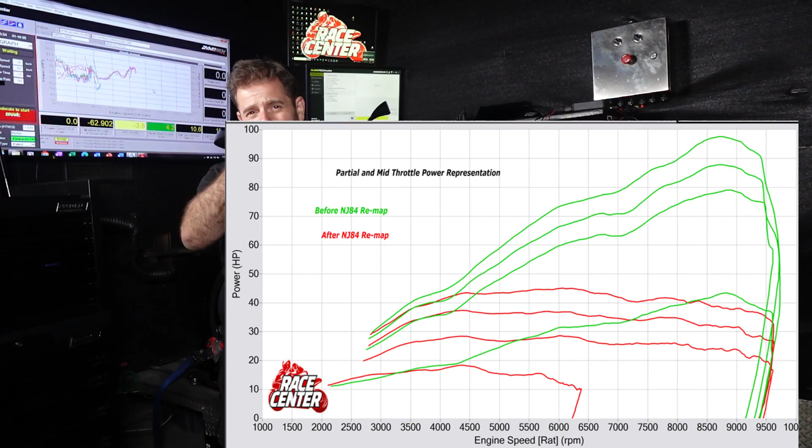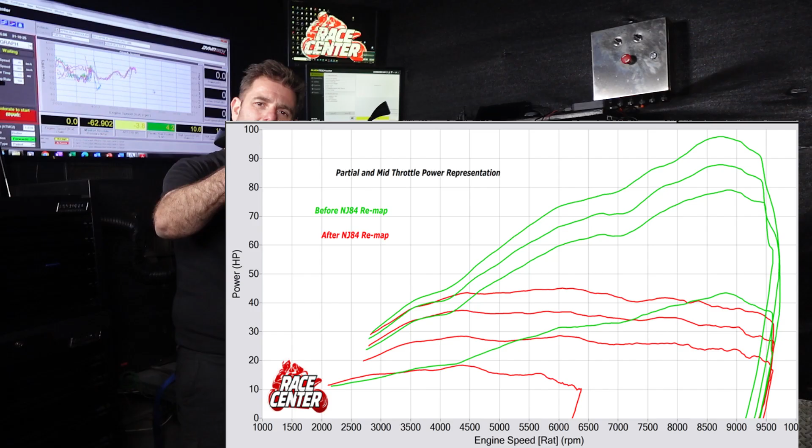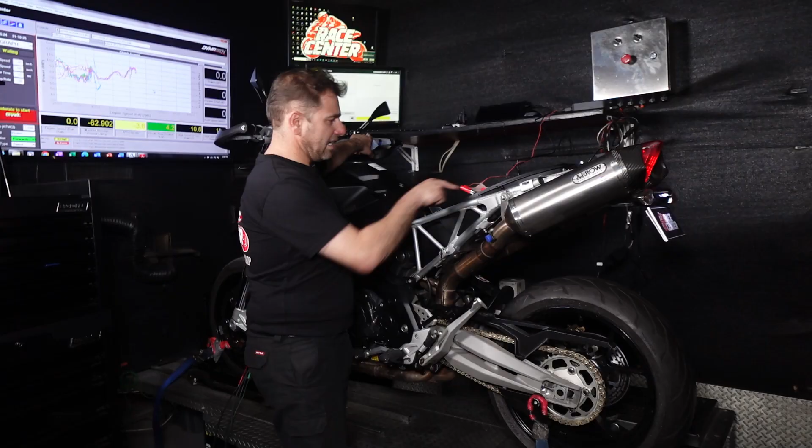You simply can't, because the way it's mapped, even if you're just going say 30% throttle at 7,000 RPM, it's going to give you like 60% throttle, even though you don't want that, because that's not what you've requested. You've opened the throttle a certain amount, and because the revs are high, it's going to give you a burst of power. So all that nice, lovely partial throttle, a little bit of power if you're going through corners or you just want a little bit depending on the RPM, you can't get it standard. They've taken it away from you because the ECU will open the throttles more than you want, because that's how it's been programmed.

So you need to understand this with these Dorsoduros, and I highly recommend getting rid of that, because when you turn them into a proper linear throttle, it's so much more enjoyable to ride. You still have all the peak power and all the mid-range and all that burst of power that is standard, but you also have all the small stuff and all the power delivery that leads up to that.

When we look at a dyno graph, it's important to understand that we're only seeing one run. If you imagine all the different throttle applications you do with your hand, you'd see all sorts of different power runs, and that's what we feel in the real world. That's what power delivery is, we're actually modulating that with our hands, and that makes it so much more fun to ride. Same with the brake, you can modulate the brake pressure you want. That's part of riding, that's the enjoyment of what we do.

When the ECU is not respecting what your hand's doing and it's doing other things like opening the throttles more than you want, you miss out on a lot of the power delivery and a lot of the power range that the engine can produce.

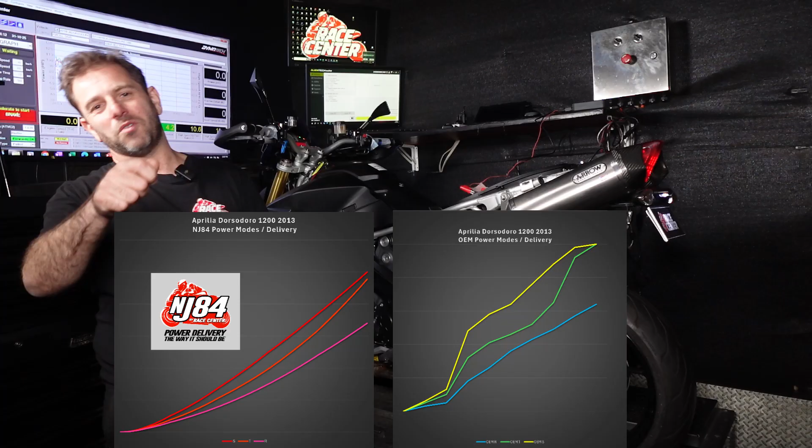Once that's all corrected, the difference is night and day. Completely different motorbike to ride. You have complete control over the power, so it's much smoother to ride. Still exhilarating, if you want all that power, all you have to do is punch it and it will deliver. But if you only want a bit, it just gives you a bit. So much more control.

So on that, the NJ84 power and torque remap in these bikes is an absolute must. It transforms the bike. On top of that, we've also done a beautiful fuel tune on this one.

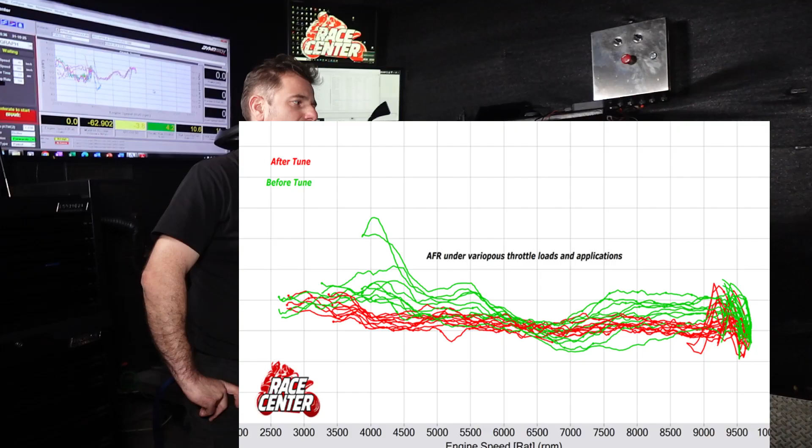This one's got a 3/4 system. It's got standard headers, but an Arrow collector and slip-ons, and it's come up beautifully.

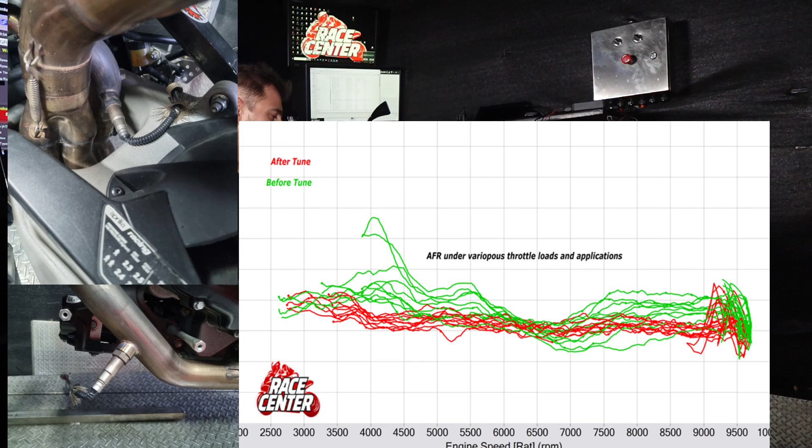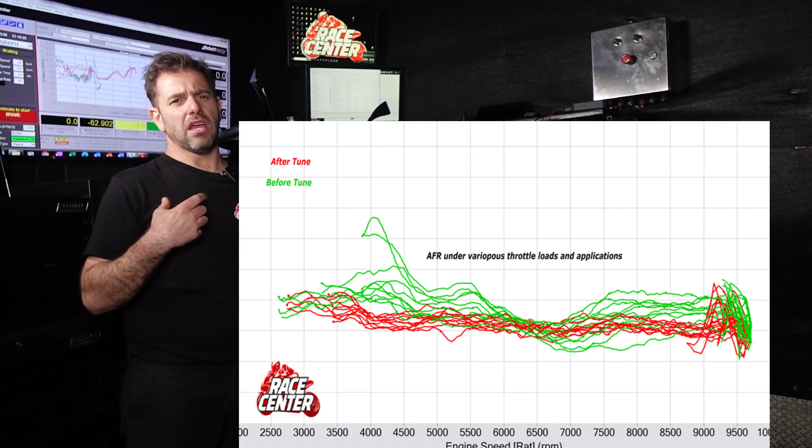We did an individual cylinder tune on this bike with our wideband O2 sensors in each header. These bikes do benefit from an individual cylinder tune rather than just an offset tune where you're taking one AFR sample from both cylinders together. We do it individually, and they do benefit - produce a bit more power, but also a fair bit more mid-range throttle response and power delivery.

At peak power, we haven't made a lot more power from what it was standard, because the fueling standard isn't too bad at 100% throttle. So it's only a little bit more, but throughout the mid-range, all the fueling is so much better that the roll-on throttle power delivery - all of that mid-range is so much stronger and better.

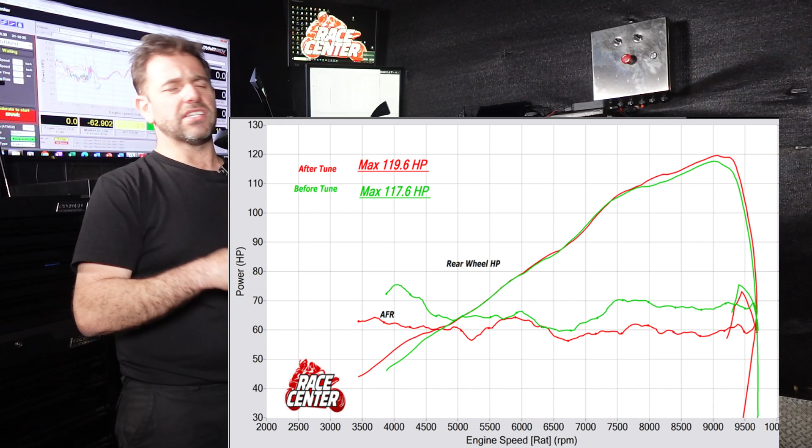And then on top of that, you've got the NJ84 throttle maps, so you've just got so much more control, and it just completely transforms the power delivery of these bikes and allows you to enjoy what is, after all, an awesome engine. It's just that you don't get to access it all standard. So that's what we do there.

I'm gonna just maybe explain it a little bit, because some people might be going, well, why on earth would they do that standard? Torque demand is a thing that is very common in fuel injection, particularly in cars, but also in motorcycles, where the engineers are actually designing torque graphs rather than throttle maps.

So what that means - if I'm going to show you that, we're going to go to that same example we looked at earlier, where we've got our NJ84 throttle traces and the standard. Now we're going to look at the measured rear wheel torque of those. What you can see is that the OEM standard torque maps - the torque line is quite linear, so it's linear torque. Whereas with the NJ84, you can see that the torque drops away substantially as the RPM rises.

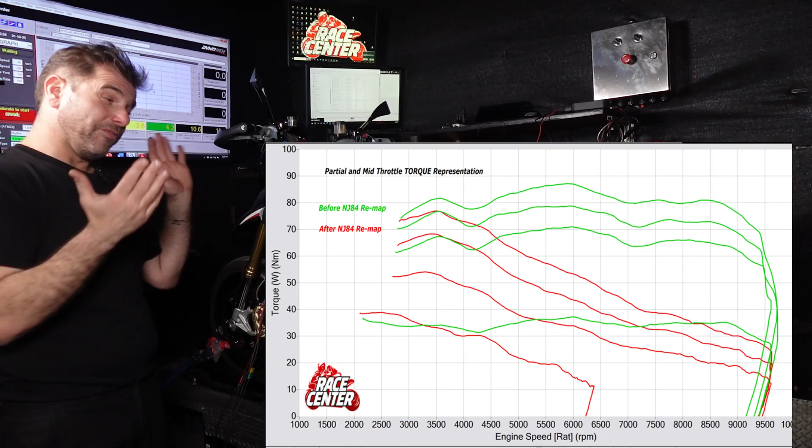So when you look at it on this graph, you might go, well, it's heaps better to have the original way where you've got these flat torque lines - flat instant torque whenever I want it, right? That is a theory that might look good on paper and on a computer, but in the real world it doesn't work. We'll explain a little bit more about why, and what torque is, in a bit.

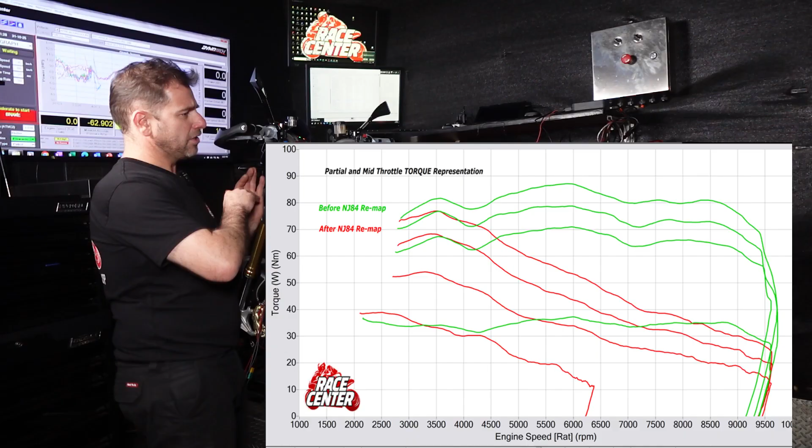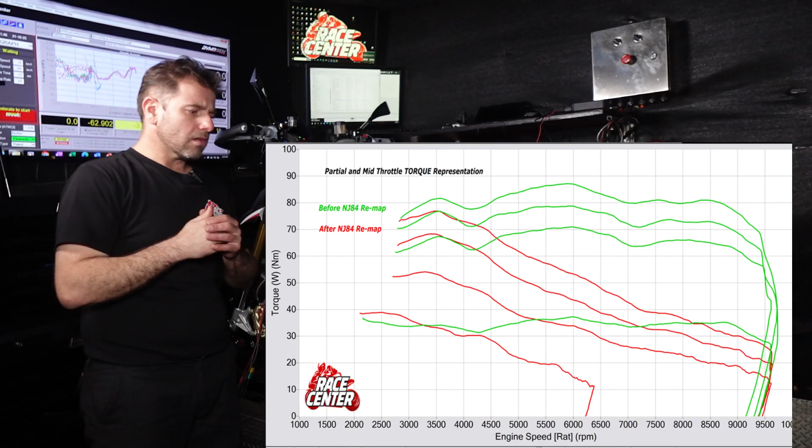But the reality is the engineers are trying to design you a linear torque map, so that depending on how much you open the twist grip, rather than the throttles opening and respecting your hand, what's actually happening is that the torque - the flat lines - just rise up, if that makes sense. So the torque rises up. And that's what the torque demand's about, and that's why they're designed that way.

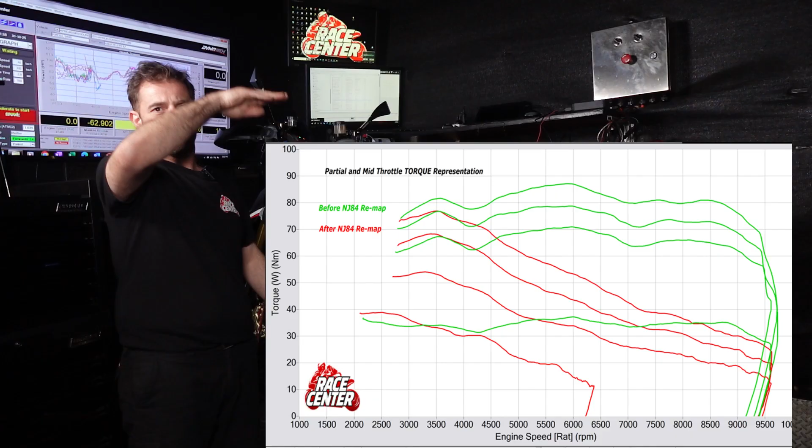And if you're just sitting there, you might go, oh, eureka, that sounds great. Let's have flat torque lines so that every time I twist the throttle, I'm just getting a higher level of flat torque line. The reason it doesn't work in the real world is because torque and power are related, but they change exponentially with RPM.

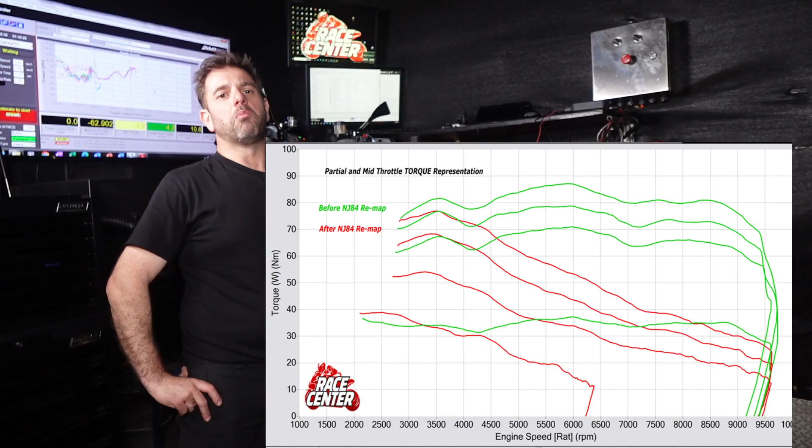So as the RPM goes up, for the same amount of torque - if we look at one of these torque graphs, if we take a particular area where we've got, at 100% throttle, around 4,500 RPM, we might have 40 to 50 type horsepower. Then when we go to 9,000 RPM, it's the same amount of torque - around the 90 to 95 mark of Newton meters of torque.

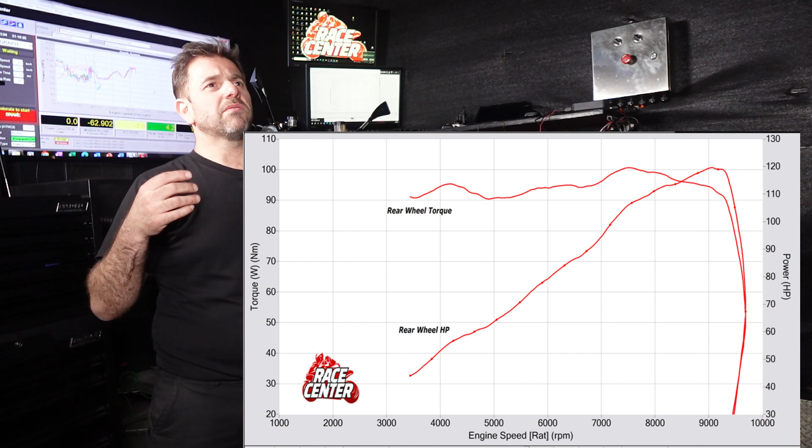So it's the same torque, but the power is significantly more because of the RPM. The reason for that is, so now we'll talk about torque versus power. Hopefully I can explain this in a way where it's not too confusing. But what you feel as a rider is you actually feel the power. So power is what you feel.

Even if you've got a bike like this one that's got low down power, we might describe it as a torquey engine. And it is, it's a high torque engine. But what you ultimately feel is the end result, which is the power that you're getting.

So I'm going to use this analogy. If you can imagine a crankshaft with pistons sitting on it, and let's imagine there's really, really heavy, massive big pistons, like say in a massive diesel engine. What torque is, so if that's all heavy and it's stationary, you're not getting any power, there's no acceleration. What torque is would be the strength of, say you had to manually crank that thing over by hand, right? And it was this big engine with a lot of resistance initially and compression in the cylinders.

Turning it over by hand would be really hard. So if you've got really thin arms, you don't go to the gym and that sort of stuff, you will find that difficult. Whereas if you get someone who's really strong, massive biceps and all that stuff, they can turn it over a lot easier, initially they'll be able to turn it easier, right? So that's what torque is. How strong is the action that's going to be able to turn it?

That's what torque is. But if we take that example, that we've finally got those pistons moving, and now we're spinning them, they're revving at 10,000 RPM, so they're flying, they're absolutely flying. To keep it going at that speed, I no longer have to apply that massive torque that I had to get it started. Just occasionally give it a bit of a tap, and it will stay there.